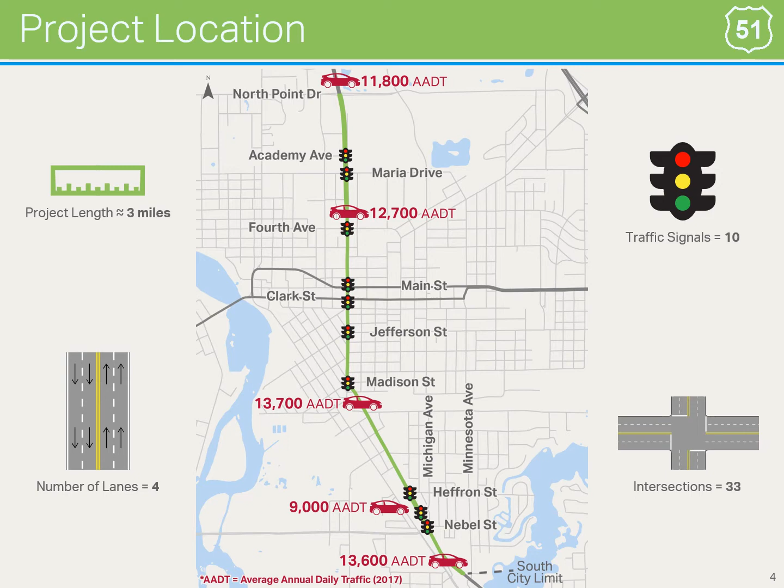At the beginning of every project, we need to determine our why for the project. The purpose and need defines the why for a project. The purpose of the Business 51 project is to address the pavement, safety, and multimodal needs of the Business 51 corridor while ensuring efficient traffic flow. The next few slides are going to discuss each of these needs, pavement, safety, and multimodal, in more detail.

If there is one thing you remember after today about why we need to make changes to the design of this roadway, it is because we need to improve safety. We can do better than the existing roadway. Crashes were bad when we first studied this roadway in 2012 and 2013. They are worse now. Business 51 north of Ellis Street has a higher crash rate than 95% of similar roads in Wisconsin.

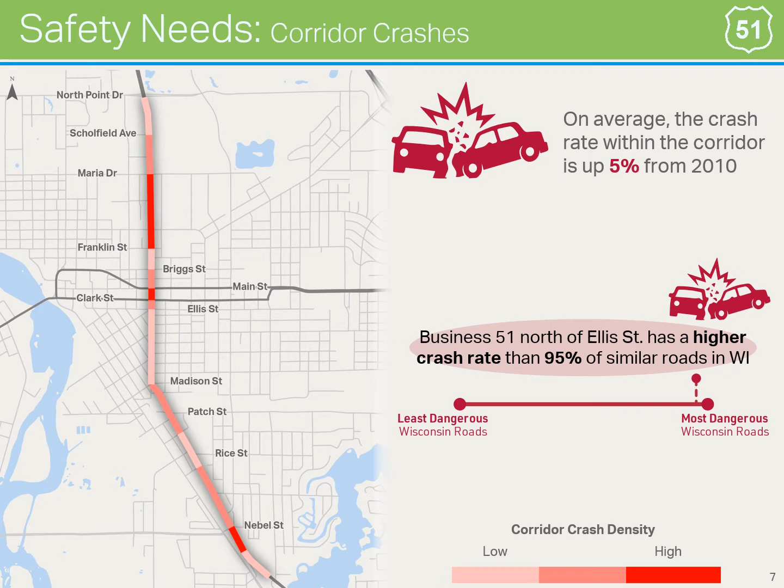Crash rate is a function of both the number of vehicles using the roadway and the number of crashes that occur. The darker red an area is, the higher the crash rate in that area. We examined all the crashes on Business 51 in the 5-year period from 2015 to 2019 to make this figure showing corridor crash rates.

In looking specifically at intersections, there are 5 intersections that have a crash rate higher than 1.0. This number is typically used as a quick screening tool to determine specific locations that need safety improvements. The good news is there were no fatalities in the 5-year time period we studied between 2015 and 2019. But intersection crash rates have also increased since the last time this corridor was studied.

Another need for the Business 51 corridor has to do with its existing multimodal accommodations for pedestrians and bicyclists. This graphic shows the distribution of pedestrian crossings at select intersections along the corridor. When you think of this corridor and whether or not it is a friendly environment for people walking, think about the fact that the vast majority of the sidewalk is immediately adjacent to the roadway, or only separated by a few feet of concrete or grass.

The area surrounding Business 51 is also home to the University of Wisconsin-Stevens Point, several K-12 schools, the YMCA, and other community facilities that people frequently walk and bike to.

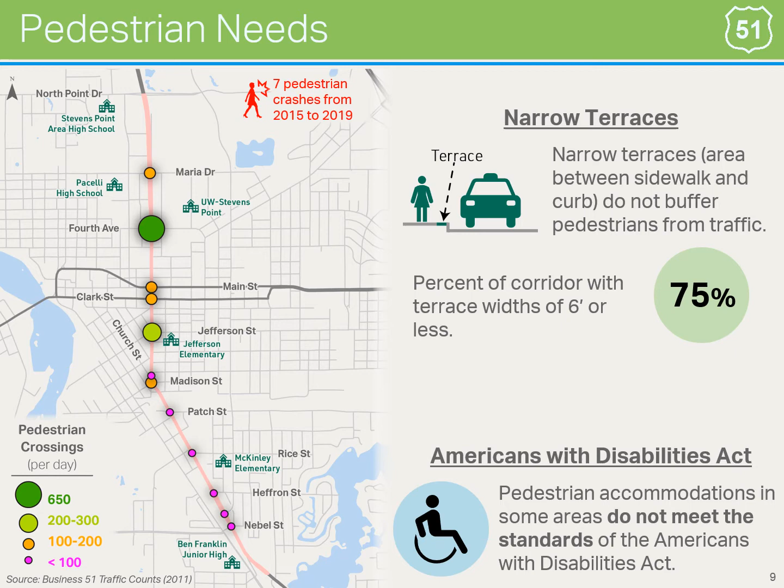Similar to pedestrian needs, many bicyclists try to cross Business 51 every day and/or travel north and south through the project corridor. Although state law no longer mandates bicycle accommodations on roadways that are reconstructed with state or federal funding, the City of Stevens Point has a complete streets policy that strives to build transportation corridors that accommodate all users, whether they drive a personal vehicle, walk, bike, or use transit. One of the key decisions we will need to make for this corridor is whether or not on-street bicycle accommodations should be included.

Another major issue on this corridor is the condition of the existing pavement and the utilities underneath the pavement. In 2019, when the pavement was last evaluated, 70% of the corridor scored less than 3 on a scale of 1 to 10. I assume this doesn't come as a surprise to anyone. It's obvious when driving this corridor that there is cracking, potholes, and frequent repairs occurring. We've moved past the point where pavement repair is economical. We need to completely replace the pavement.

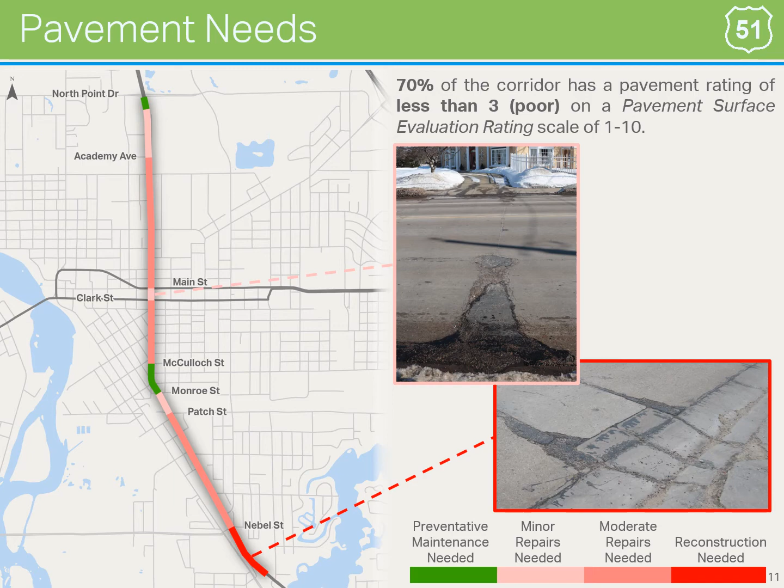You may have noticed that we haven't talked about improving traffic operations as one of the project needs. On the first slide for this section, we stated a desire to simply maintain traffic flow. Overall traffic volumes have been decreasing on this corridor since 2005. Given COVID, this trend is likely to continue. Despite this decrease, it should be noted that for planning purposes, the project team is going to assume that traffic is growing at 0.5% per year when we analyze any improvement alternatives. This will ensure that we are being conservative in our traffic models.

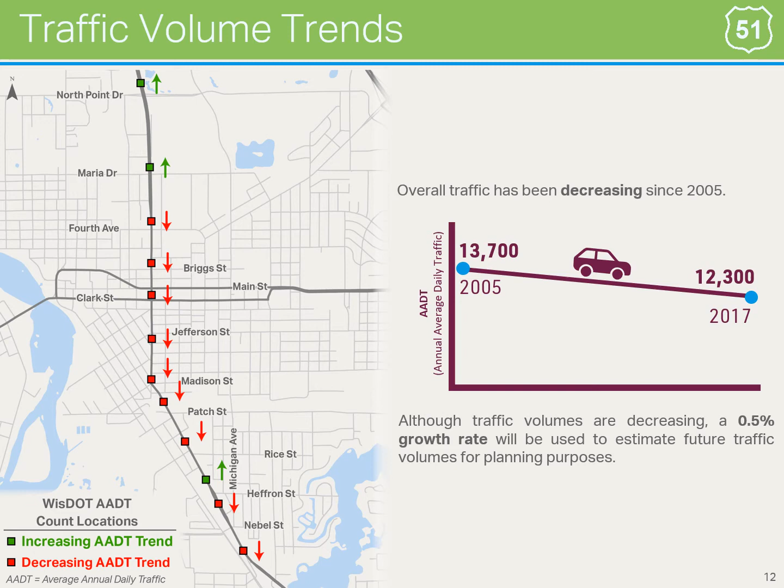That wraps up the purpose and need part of this presentation. In summary, key needs for the project are pavement, safety, and pedestrian and bicycle improvements.

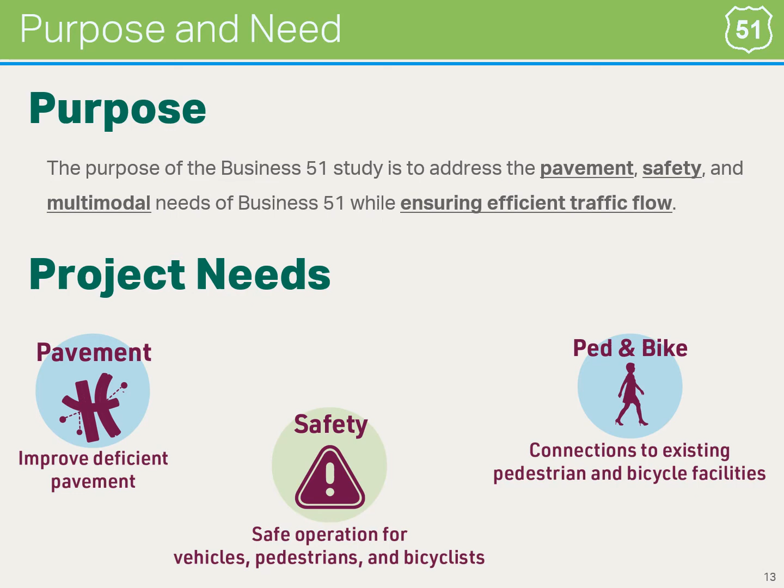The next part of the presentation will focus on potential improvement alternatives for the corridor. Potential alternatives were first studied in 2012 and 2013 as part of a previous study. All of the alternatives from that study have been reviewed and modified.

Let's start with a high-level review of the alternatives we are considering. The no-build alternative means to do nothing beyond routine roadway maintenance. As time goes on, this alternative becomes less and less cost-effective and results in a patchwork roadway that still has safety problems and poor pedestrian and bicycle accommodations. This alternative is typically carried forward for impact comparison purposes only.

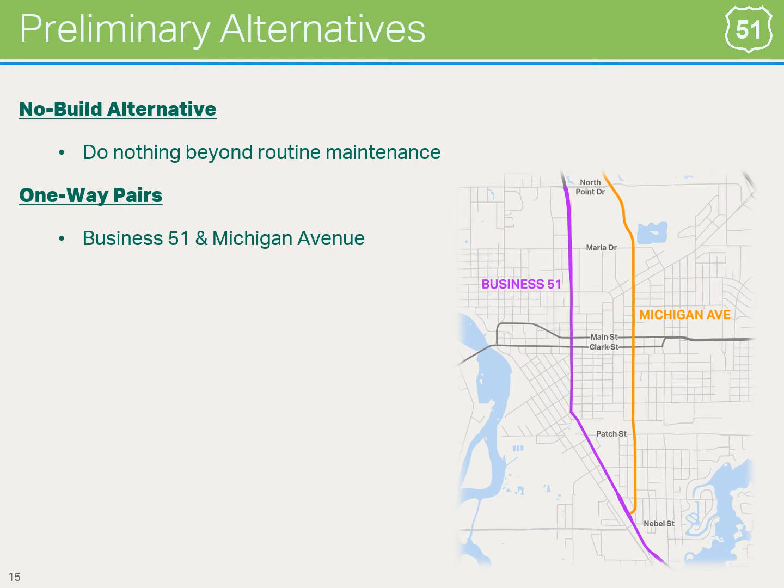A one-way pair alternative using Business 51 and Michigan Avenue was suggested by the public during the 2012-2013 study. This alternative was not carried forward because the 6-block separation between Business 51 and Michigan Avenue would result in significant cut-through traffic on local streets and issues for bicyclists and transit users.

The 2-lane and 4-lane alternatives include either a 2-way left turn lane or a raised median, depending on location. Other typical section elements to be considered include terraces, sidewalks, and bike lanes. If any of these terms are unfamiliar to you, I encourage you to take a look at the roadway terminology exhibits posted on the website.

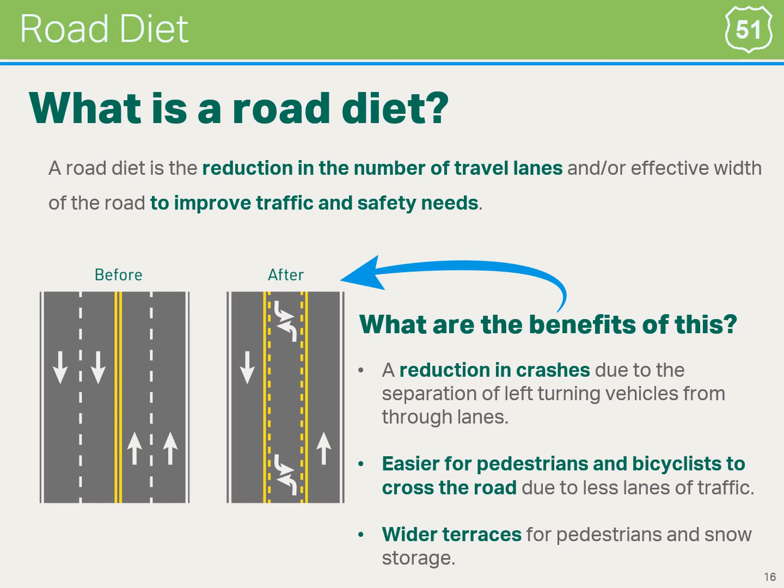One of the big questions we received from the public during the previous study in 2012 and 2013 was, will a road diet really work on Business 51? A road diet is a reduction in the number of travel lanes. The main benefits of a road diet for Business 51 are the potential to improve safety and multimodal accommodations while reducing the amount of right-of-way needed.

Business 51 is a good candidate for a road diet. Its existing and future traffic volumes are well within acceptable ranges. It has a low posted speed. It is experiencing safety problems as a 4-lane roadway, and there is a desire to make the roadway more inviting to pedestrians and bicyclists. With proper signal timing and coordination, a road diet can be implemented on Business 51 without significant negative impacts to traffic flow.

Now let's talk about the details of the alternatives proposed for Business 51. For the purposes of describing the existing roadway and potential improvement alternatives, we've divided the roadway into 3 segments: south, central, and north. Each segment has a unique typical section and surrounding land use.

The south segment, defined as the area between the south city limits and Patch Street, is primarily a 4-lane, undivided roadway. It's surrounded by commercial land use and an abundance of access points. The existing roadway has narrow terraces, which provide little separation between the sidewalk and traffic for pedestrians, and very little room for snow storage.

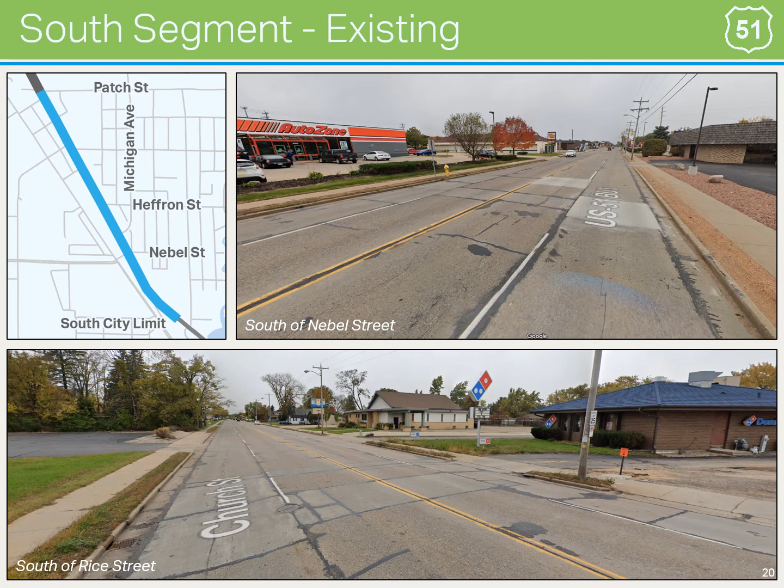Traffic turning into adjacent driveways must stop in the inside through lane to make a left turn. The aesthetic character of the roadway is low. The pavement condition in this segment of the corridor is very poor.

We're looking for your input on the following decisions for the south segment. Should the roadway be 2 lanes or 4 lanes between the south city limits and Michigan Avenue? If there is a 2-lane alternative in the south segment, we could transition from 4 lanes to 2 lanes immediately north of the railroad tracks near the south city limits. Or we could transition from 4 lanes to 2 lanes at the Michigan Avenue intersection by dropping the right lane into a right turn only lane at the intersection.

Another question is whether or not there should be a raised median south of Michigan Avenue if a 4-lane typical section is desired. Regardless of which option is selected, driveway consolidation will be considered to reduce the number of conflict points present in the south segment.

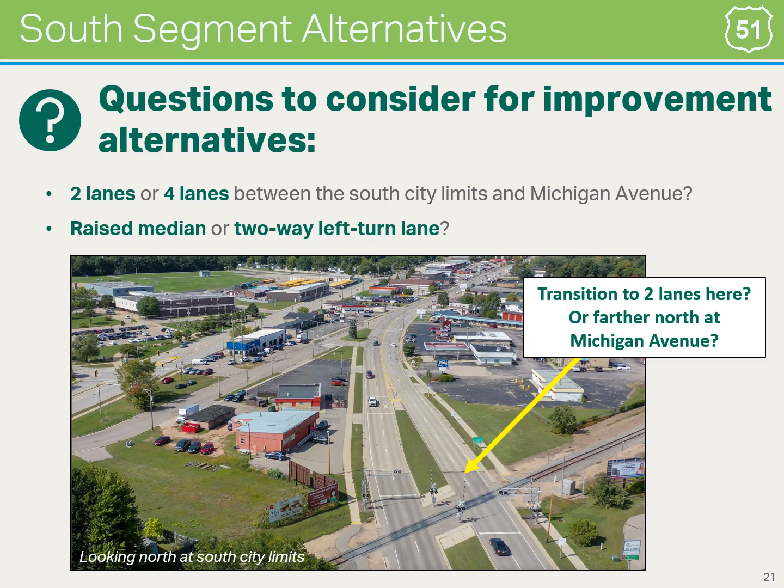We also need to determine whether we want to include on-street bicycle lanes in the south segment, or whether bicycle accommodations are better suited for parallel or adjacent streets. The project team prepared an exhibit detailing potential bicycle accommodations on nearby streets that could be considered if bicycle lanes are not included on Business 51. This exhibit is included on the project website for your review.

Another design decision to be considered is the width of the terraces between the roadway and sidewalk. Wider terraces would create a more comfortable environment for pedestrians. See the detailed alternative exhibits for the south segment on the project website for more information on alternatives in this area.

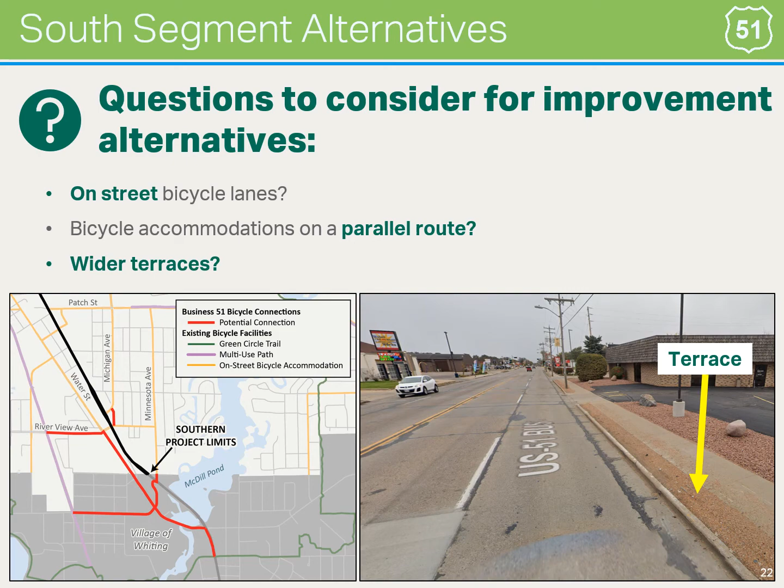The central segment, defined as the area between Patch Street and 4th Avenue, is primarily a 4-lane, undivided roadway surrounded by predominantly residential land use with commercial land use on either end.

The railroad underpass north of Patch Street will not be changed as part of this project. Therefore, all potential alternatives must utilize the existing width under this bridge.

In the residential area, the roadway is defined by narrow grass terraces, which do not properly buffer pedestrians from traffic. In the winter, snow storage is an issue, and snow and garbage cans are often blocking the outside lane of traffic because there is not enough room on the terrace.

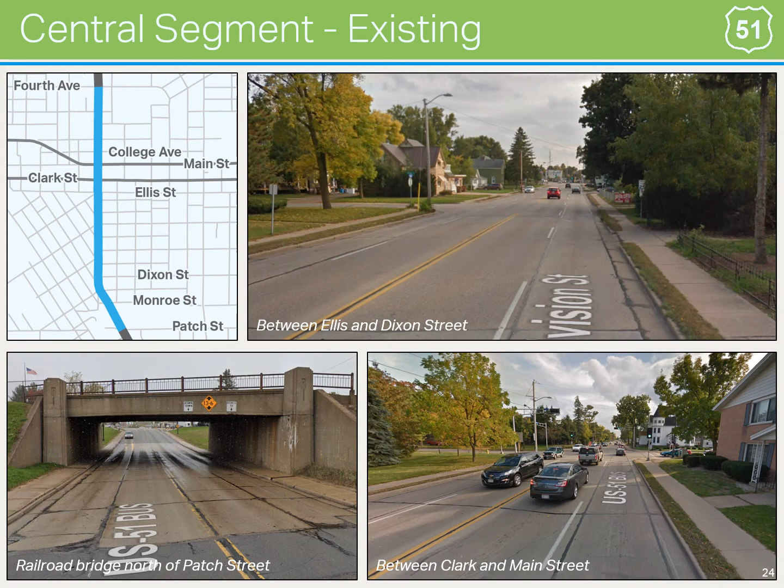The section of Business 51 between Clark and Main Streets is an area with high volumes of turning traffic and significant safety problems.

The central segment is a good area in which to consider a reduction in the number of travel lanes from 4 to 2. By doing this, we can improve safety and traffic flow for vehicles by providing a dedicated left turn lane in the center of the roadway.

We can also improve safety for pedestrians by reducing the number of lanes of traffic they need to cross and providing more distance between the sidewalk and the street.

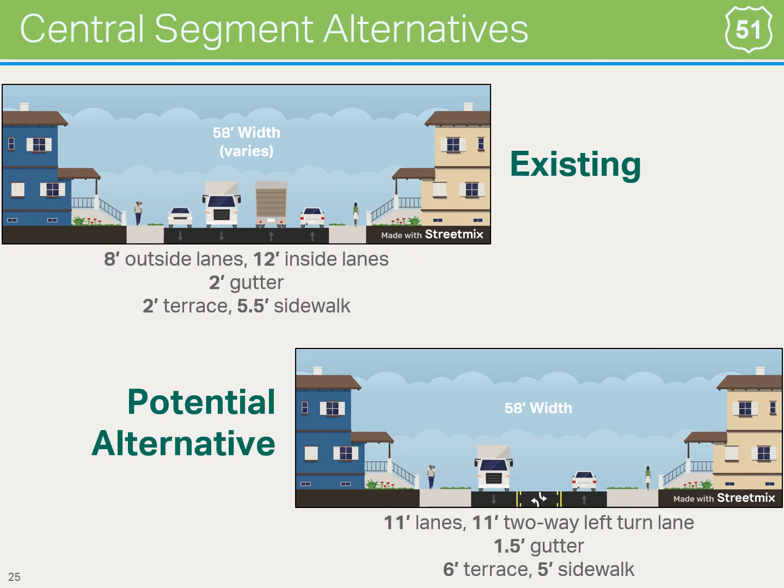A key decision to be made for the central segment is whether we want to prioritize creating better accommodations for pedestrians or bicyclists. If a 2-lane roadway with a 2-way left turn lane is selected for the central segment, there will be enough room within the existing right-of-way to make the existing terrace wider.

There will also be room to build pedestrian islands at key intersections to make crossing the roadway safer. If bike lanes are also desired in the central segment, right-of-way acquisition will be required.

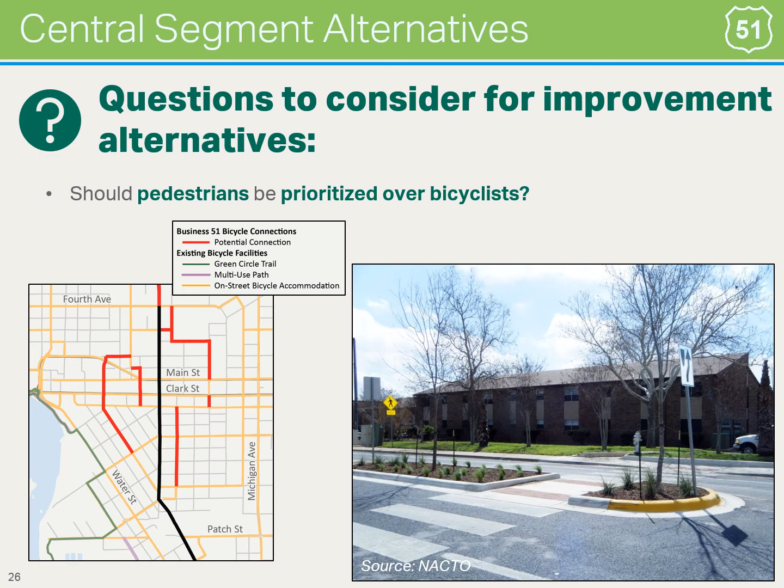The area between Clark and Main Street will be the most challenging area in the central segment in which to make improvements. The existing right-of-way is narrow and there are improvement needs in this area for vehicles, pedestrians, and bicyclists. Please see the detailed alternative exhibits for the central segment on the project website for more information.

The north segment, defined as the area between 4th Avenue and North Point Drive, is a 4-lane roadway with both a 2-way left turn lane and a raised median. Commercial land use surrounds the corridor on both sides.

The existing roadway is the widest in the north segment. Between 4th Avenue and Maria Drive, the roadway has a 2-way left turn lane. Between Maria Drive and North Point Drive, the roadway has a raised median. For the majority of the segment, there is a wide grass terrace and sidewalk.

The 4th Avenue intersection is an area of concern. The crash rate here is a problem. We've observed more than 650 pedestrians cross the street in a single day, and the existing right-of-way within which to make changes is very limited.

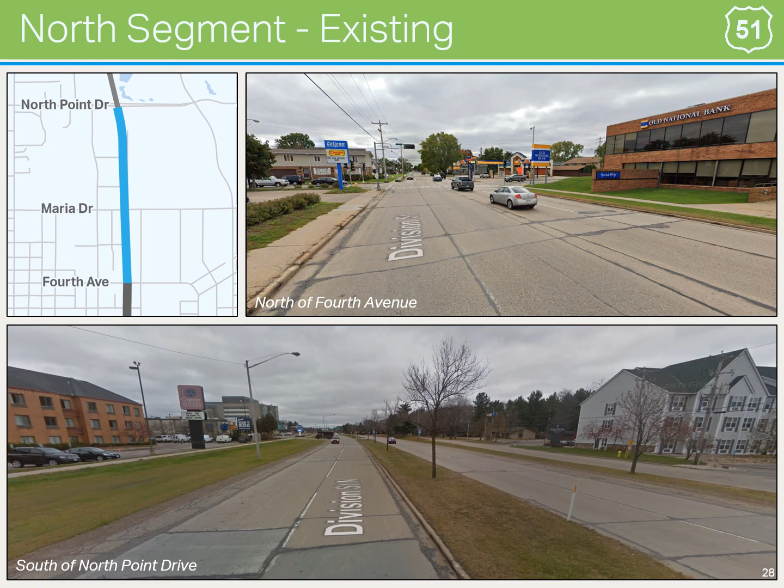We're looking for your input on the following decisions for the north segment. Should the roadway be 4 lanes or 2 lanes? Although the existing roadway is 4 lanes, traffic volumes here do not necessitate a 4-lane typical section.

If the roadway were 2 lanes, a significant amount of right-of-way could be repurposed and used to create wide, tree-lined terraces, a landscape median, bicycle lanes, a multi-use path, or wider sidewalks.

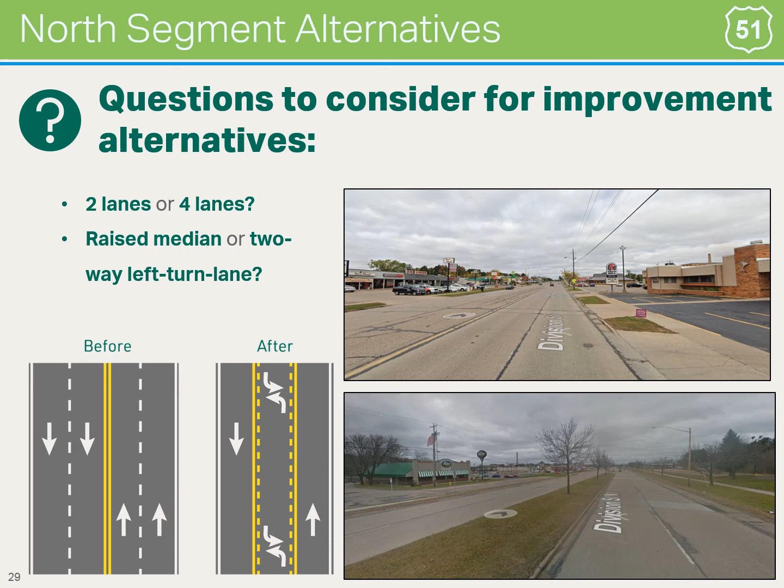Another question is if the roadway should have a raised median or a 2-way left turn lane. A roadway with a raised median is typically safer, and the median also provides room for stormwater infiltration, snow storage, and aesthetic improvements. Roadways with 2-way left turn lanes are typically used in areas where access to multiple driveways is necessary and driveways cannot be consolidated.

Another question to consider for the north segment is if bicycle accommodations should be on-road or off-road. If they are on the road, should we include a painted buffer to separate bicyclists from traffic? If the accommodations are off-road, should we have a multi-use path or separate facilities for pedestrians and bicyclists?

The amount of existing right-of-way in the north segment allows us to really think outside the box in this area and consider how we want this corridor to look, feel, and operate. Please see the detailed alternative exhibits for the north segment on the project website for more information.

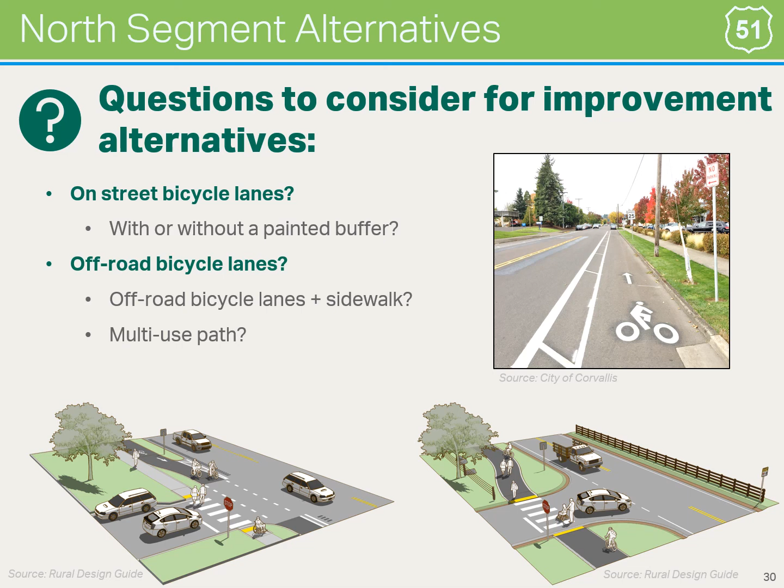I encourage you to review the alternative exhibits on the website for further details on the proposed options for each area of the corridor. Now, let's take a couple minutes to discuss what's next and how you can let us know what you think about the items we've discussed today.

There are many opportunities for you to give the project team feedback. Right now, we are discussing the purpose and need and preliminary alternatives for the corridor. In a few months, we will move into the evaluation of alternatives phase. And finally, we will recommend an alternative for the corridor and the project will move into the design phase.